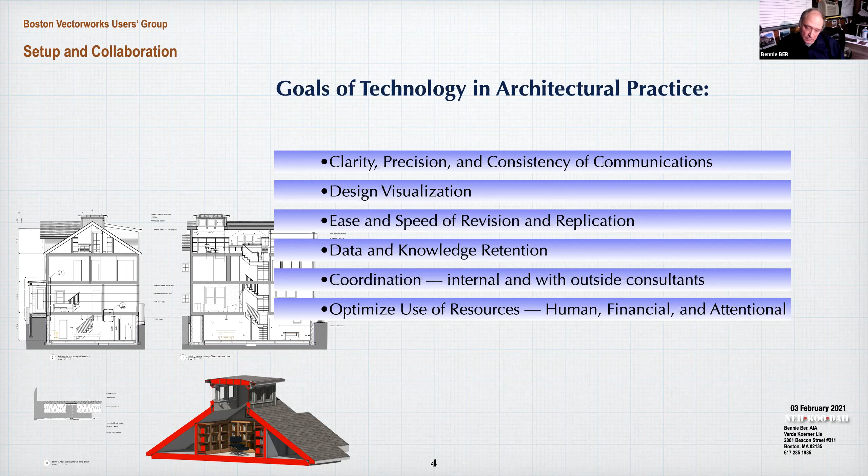And there's the obvious advantage of coordination, both internally between our own documents and then with outside consultants. And we, like I said, we want to be smart. We don't want to waste time or energy. So we want to optimize our own resources as we work. And like I said, the complexity is growing. We don't see that it's slowing down or it's going to stop or it's going to come to some kind of plateau. We just need to be ready for it.

Now, I don't know whether it happened to you, but it happened to me on a number of occasions where I opened the file that could be from another consultant or the client or some third party, and looking at it, it's like a bowl of spaghetti.

It's a bunch of lines, frequently all the same color, all on the same class or layer, as other packages call it, and I couldn't make sense of it, and that really saps a lot of energy. Instead of actually doing the work, I'm trying to figure out what it is that I'm looking at.

Now, that Intergraph station that I showed you earlier had some classes built into it, or layers, I'm sorry, they called it layers. You could have 64 layers, and who would ever need more than 64 layers? Now, there was this minor thing that you couldn't name them. They were numbered, I think it was 0 through 63. But then how difficult would it be to remember what you put on layer 23 or layer 55?

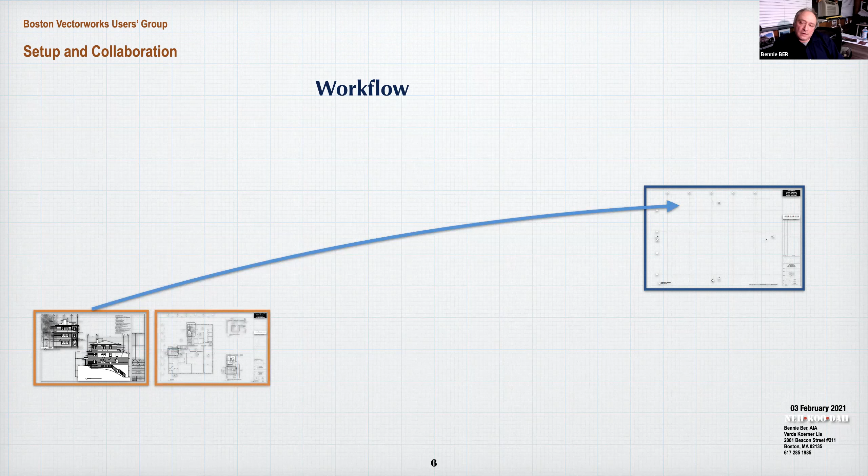So how did we start with it? And that was years ago. When we start a new file, a new project, and we start working on it, we refer back to an old project and we just cannibalize pieces from it—symbols, line types, whatever, details. And then we cannibalize pieces from another project, and this way that was the basic approach to recycling knowledge, recycling things that we've already knew how to do.

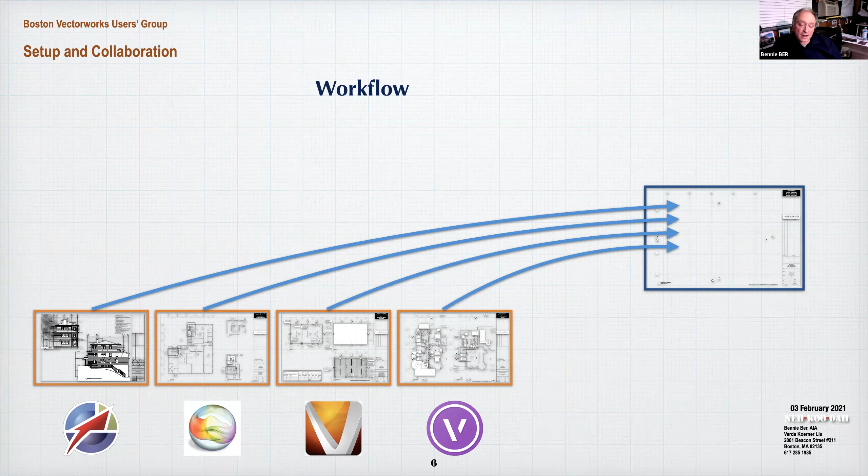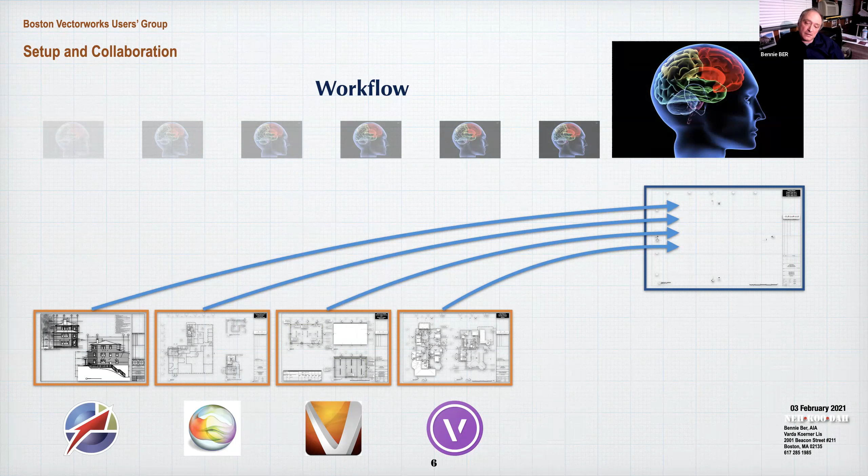And it can make sense, except that each one of these projects was done in a different version of Vectorworks. So the level of sophistication, the use of the technology was uneven. So if you go back to a 10-year-old project and you get things out of it, you may be dragging with you all kinds of unwanted legacy. Additionally, there's another little thing, is that our mastery of the technology evolves with time. So the things that we knew when we did the earlier projects may not be the most state of the art.

So, okay, we know that layers or classes are important, and we don't want to spend time trying to figure out where to put things when we work on a project, because we draw a line, we need to decide where it's going. Creating a template gives you a framework with all the places to put stuff in it. So first, where are the templates? If you go to Vectorworks preferences and you look at the user folders and you reveal them in Finder, it will tell you where they are.

On the Mac, it's in the Macintosh library, which is kind of hidden by the operating system, so you kind of need to know the secret how to get to it. But if you go through it, you get straight there, and then you see that under the Vectorworks folder, there's a folder for each release of Vectorworks, and then there are libraries, and under defaults there are the templates, and under the templates you have some folders for various templates. And essentially everything that we modify that is our own, we put the letters NKD to it so that we know that it's ours, and that's where we find it.

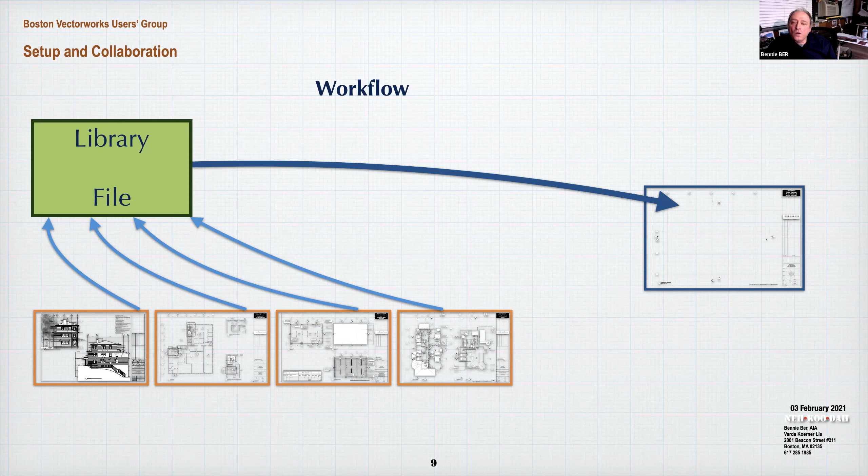So our workflow now is that we still have those old projects that we worked on 10 or maybe even 15 years ago. But instead of cannibalizing them directly into the new project, when we see something in each of the old projects that we think is worth preserving and using in the future, we just drag it into a library file. And then from the library file, we bring it into the new project. What that does, it gives us a centralized location in a library file where if changes need to be made, if a new release of Vectorworks introduces a new capability that's useful for any of these particular resources, we just update it there, and it's only one location that we have to go to.

Now, Vectorworks itself builds suggested workflows into product updates, and those change. I remember they used to have those default layers that were called mod-something. Maybe some of you remember. They've abandoned those, and they have new ways of doing it with the stories. They streamlined the creation of design layers. So we actually removed design layers from a template, and we just have default layers for stories that enables us to generate those layers quickly on an as-needed basis.

And we found out that sometimes the template gets very bloated, and just when we start a new file, even before we drop the first line in it, it's already 40 megs in size. So we try to get that under control to the extent that we can. The resource browser matured into the resource manager, and it has more and more capabilities with each release, and we use it more and more.

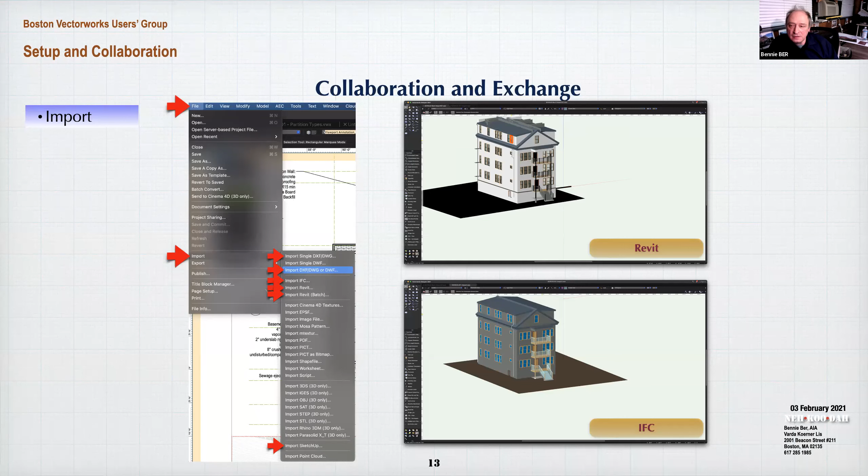I can tell you that the IFC import was a lot smoother, took a lot less time. Revit was a lot of trial and error. The IFC import is, like I said, more stable, and it has more options, and it has the advantage of being imported as a reference. So this is one way of looking at what's available for import in IFC. IFC, I believe, stands for Industry Foundation Classes. It's an exchange format for BIM. I don't know a whole lot about it, other than that it works.

And when I tried to talk to Vectorworks tech support about extracting IFC data for scheduling purposes, they essentially dissuaded me from doing that. They said, no, that's not how you do it. So it has a limited functionality, but within that limited functionality, it works well.

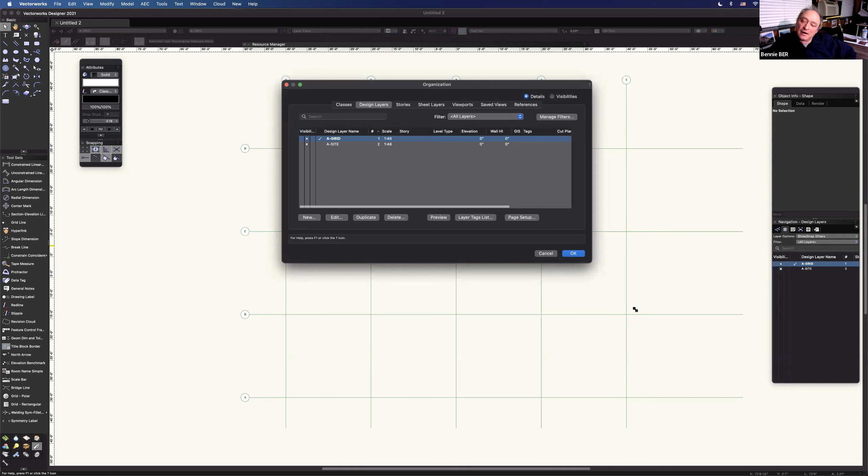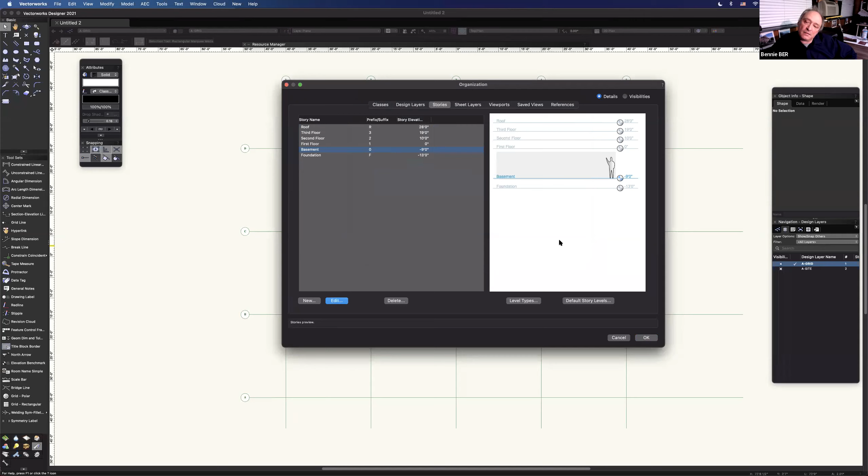If we need to create new design layers, we can do it through the stories. We have a number of stories predefined, but they don't have design layers associated with them. So for example, I know I'm going to have a basement, and if I click edit, we have an existing to remain, new work, and demo layer, and just put a check next to each one and say okay, and here they've been created automatically. Same thing we do for every other layer.

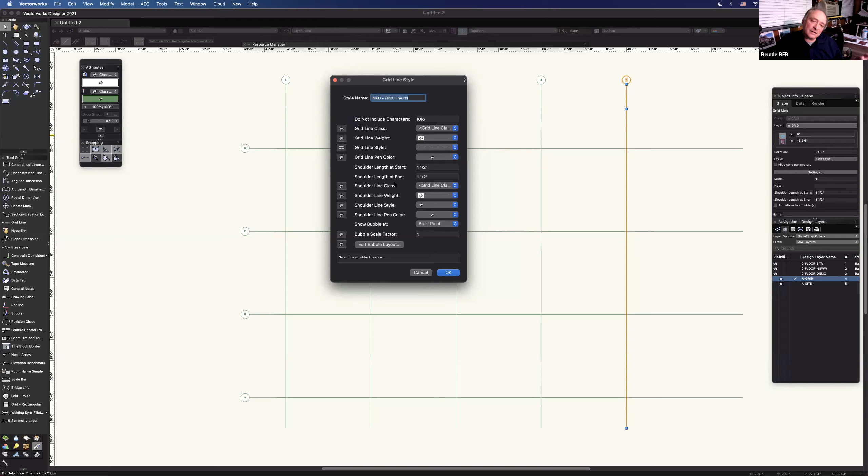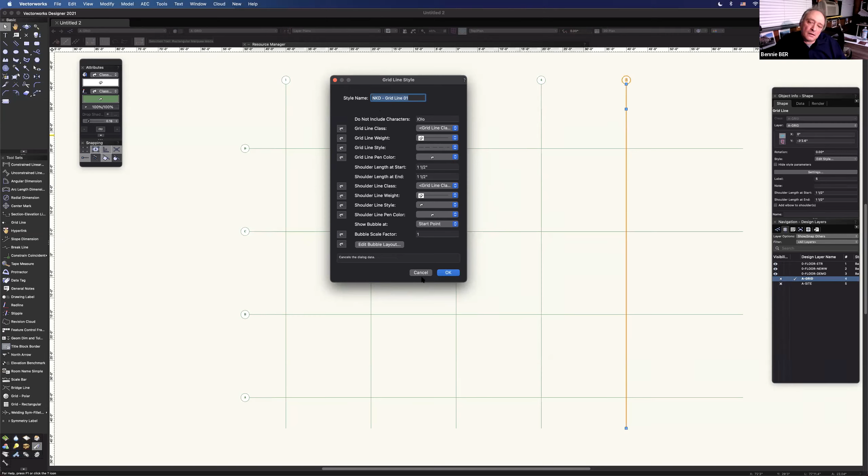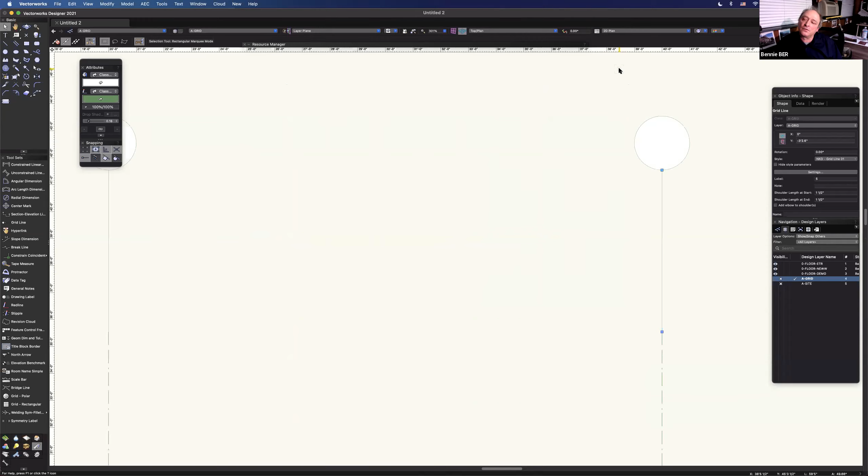So we predefined a style for a grid line that has our letters, the NKD here, and this is how we use them. This enables us to use different typefaces for different styles, because we used to try to be consistent and everything was the same typeface, and now we realize that it may make sense to make the grid line number or letter a little different so that it stands out on the drawing sheet, and we control it by style. Same thing we do with the drawing label style. So those styles are defined in our template.

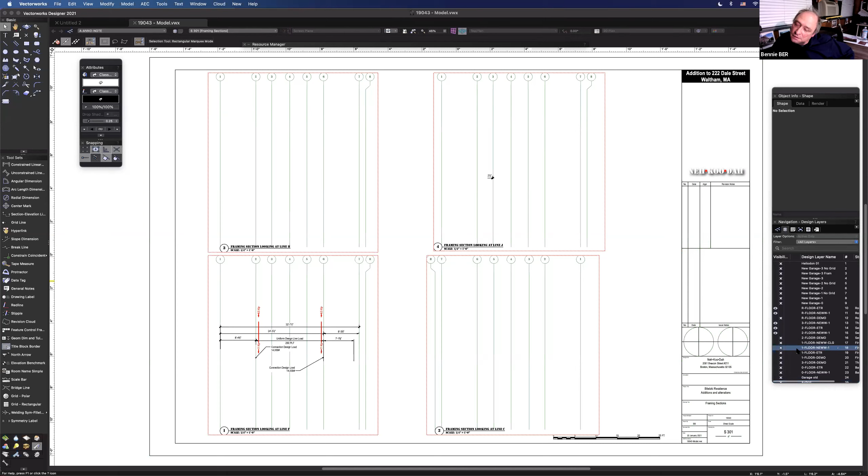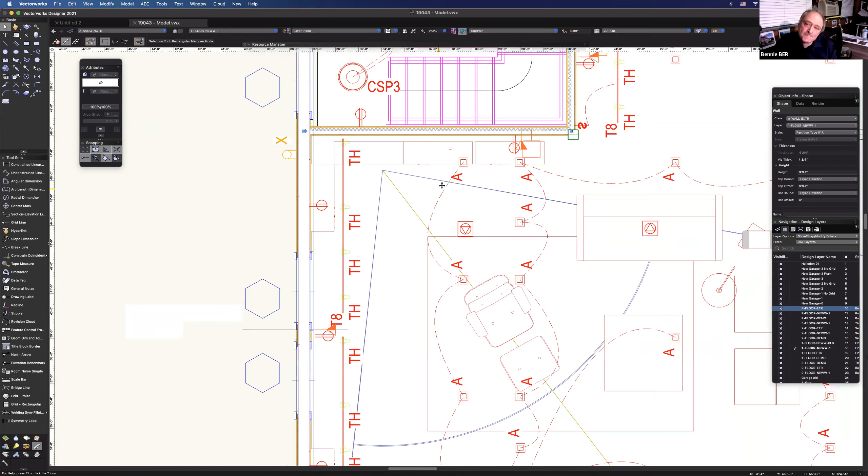So I'm going to go back and open a file of a project that's in progress. It's a project that we're working on right now. And it has a number of different styles assigned to it. If I pick a wall, this is an exterior wall. Actually, this is not an exterior wall. I have an exterior wall here, and it has a style right here. And if I go to edit that style, I can see that it has a number of components. It has a fiber cement siding. It has sheathing. It has the framing, and it has the gyp board.

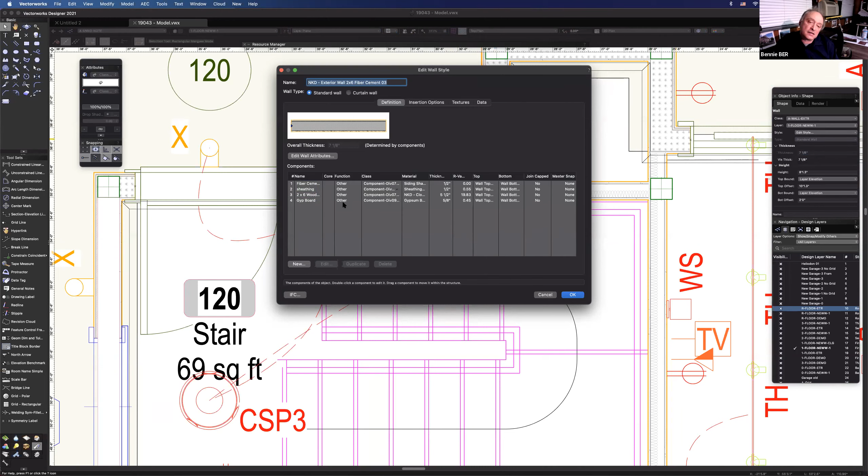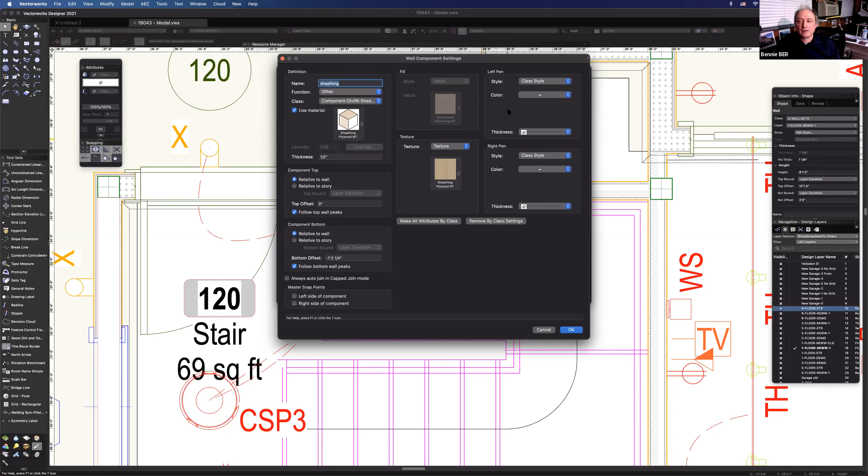And each one is assigned to a class. So if I, for example, look at the sheathing and I go to the class, it's assigned to component division 6 sheathing. And in this case, it also has a material assigned to it. But everything else we try to define by class. So this wall, if we want to control its graphic attributes at different scales and different types of viewports, either plan or section viewport, we can control it per scale, per viewport, and it always defaults to the attributes that are assigned to that class.

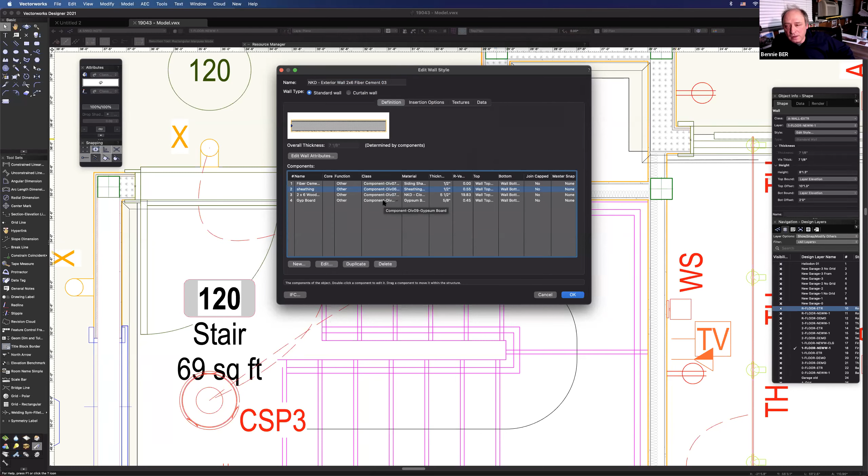So each piece of that wall can take different attributes, and there's more graphic control for us on the way the documents end up looking. Similarly, doors. This is a door style. I can edit this style. And here I see, it's very similar to the door settings, except that it defines by style. So everything that has that little curvy arrow here is going to take its definitions from what it says here.

So at this point in this project, we were concerned about the trim, because we wanted to have some exterior views that may be rendered. So we assigned a particular class to everything that says exterior on it here. But one of the powerful tools with door and window styles is that if I have it defined for one style in this file the way I want it, I can then go and import class settings from any other style that already exists in this file. And again, this goes to graphic consistency.

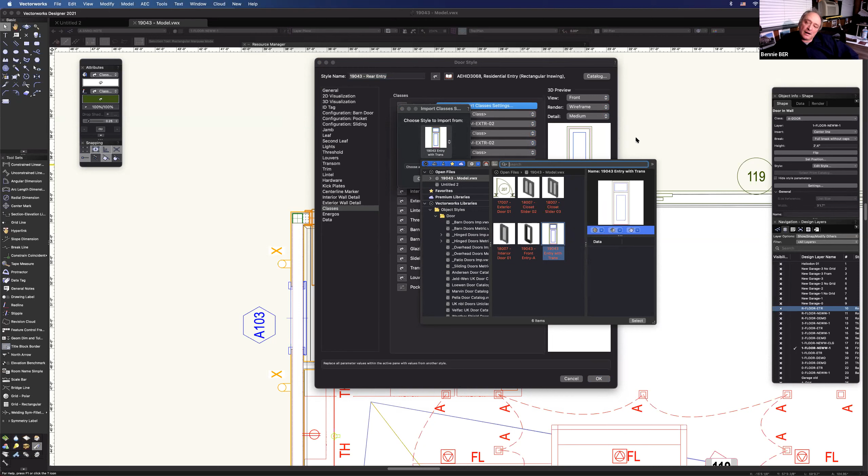So it saves us time. We don't have to do it one by one for each door or for each door style. We define it once, and then we deploy it for all the doors in the project. And when that's assigned, then all we have to do is go to that class of the exterior trim or whatever and change its texture. And now instead of gray trim, we have white trim or whatever. And we can make changes quickly.

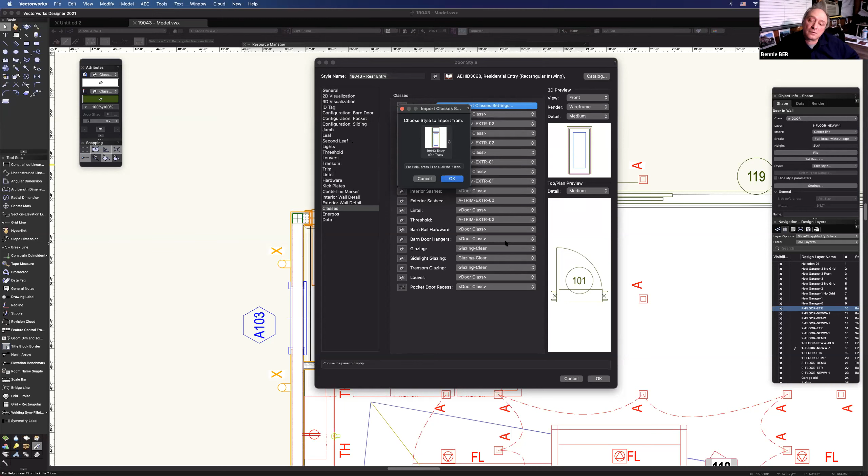Same thing for things like thresholds. Sorry. If I go to the threshold and I have a number of different dimensions that are defined for the way the threshold works on this door, I can import it from another style. And again, same threshold for every exterior door. Same goes to trim. Can import from here. So we use it more and more. That's what I find.

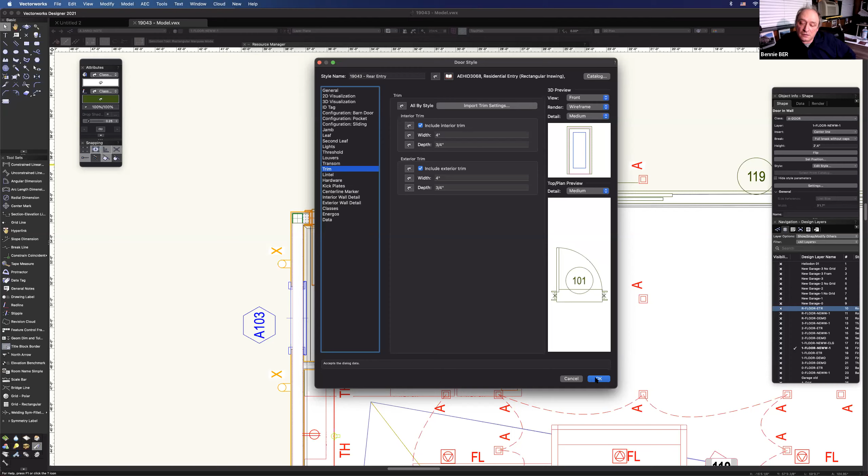If I cycle back to where we're talking about exporting DWG, if I want to export the DWG of this file and send to a consultant, I go to the export here and I get the export options. And here I have a number of export settings that I created for different consultants that we work with. So that, for example, we have a consultant, Energy Economics Inc.

If I want to export to EEI, I know what version they're on. I know what they want to receive from us. I know that they're MEP and electrical, MEP and fire protection consultant, so they're not interested in other things. I can tailor the type of export to what they need, want, and expect.

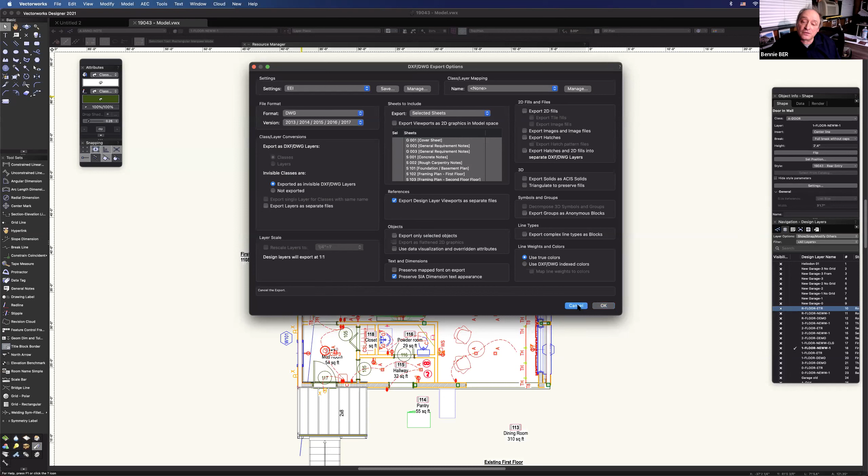So at this point, I'd like to know if there are questions or anything that you'd like me to cover that I haven't. Does anyone have questions for Bennie?

Yes, I think Bridget is trying, but we don't hear her. Sorry? Oh, she's asking questions. We're not hearing her. Can everyone unmute yourself? Bridget, well, she put something in the chat. Oh, that's right. I'll look for it. No, that's odd. We can't hear her. Huh. You're talking about me? No, I didn't put anything. Bridget, you can hear us, of course, right?

Bridget asked that with the DWG, she usually sees single lines when they import DWGs. Is there any way to avoid this? Single lines instead of what? Of walls? Yeah. I haven't seen that, so I don't know. But like I said, we don't do a whole lot of DWG import. A lot of the DWG import that we do is from survey engineers, and they don't really send buildings; they send sites. So I haven't seen this kind of loss of double lines to single lines.

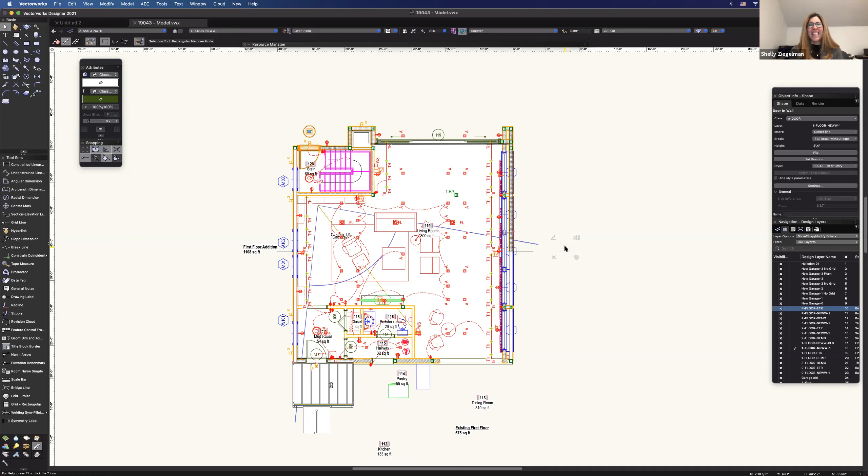So, we also don't do a whole lot of round tripping, and I don't know if any of you do a lot of collaboration and exchange and round tripping, and have more experience with that. We try to actually minimize it.

One of the things I like about project sharing is that you can lock people out so that they can just view layers, and some of those critical layers, like the ground plan, cannot be moved by anybody without administrative rights.

Again, there are different ways to skin a cat, but I would do that with references, so I can put the things that are critical in a file that's really not accessible to others if they're not going to change.

There's a question about when would it be productive to use IFC. I find IFC to be useful exchanging with Revit users. I think we've had success going both ways with IFC, both from us to them and from them to us. And like I said, there's a little more stability and more predictability in how it works.

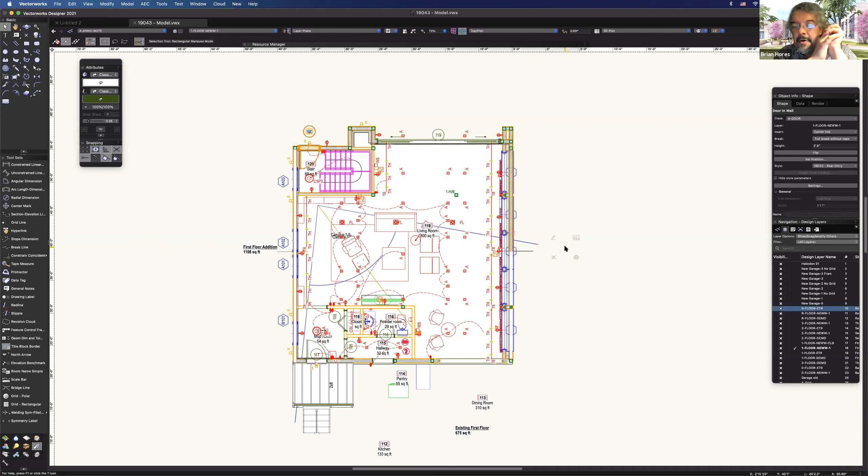So you can take the objects and manipulate them, but it's not really supposed to be used that way. It's sort of a temporary way to maybe get your model to look good for a rendering, like that column sticking out of the wall, I need to move it back to make it look right. I can manipulate it a little bit, but really everybody takes care of their own trade and updates the model as changes are made.

Hey Bennie, can I ask a question? Go ahead.

You were talking about importing like a survey as a reference file, setting up a reference file, which makes sense to me. We always have that issue — if we just import into our file, then you get all those other classes and it just makes a mess of things. So can you just explain how you do that? Because I have actually not used reference files.

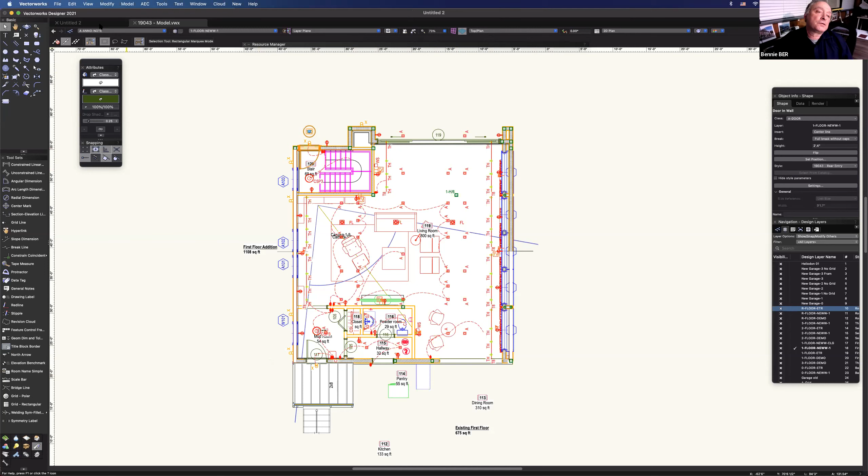So right here, this was the file that I opened from the template. It's not really an empty file, but there's no building geometry in it.

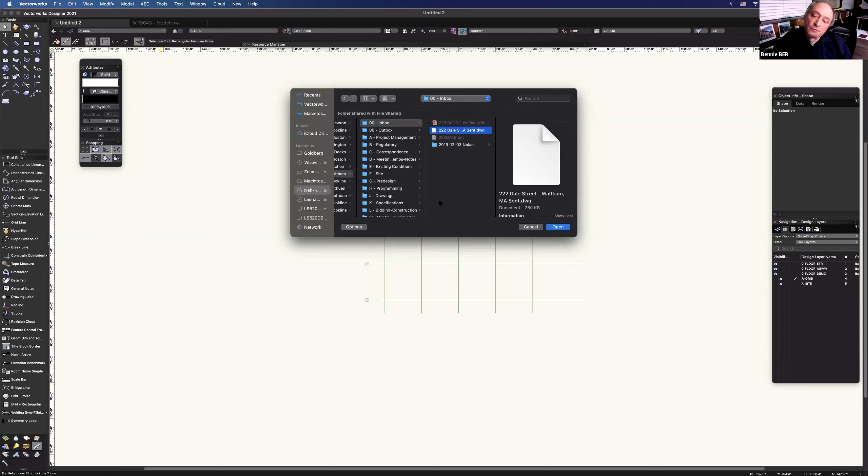If I go to import, and I want to import a single DWG here, it asks me where to find it. I'm going to see if I have a survey of this same project we're talking about. So, okay, here is a DWG that came from a survey engineer. I think this is it. I say open, and it reads it.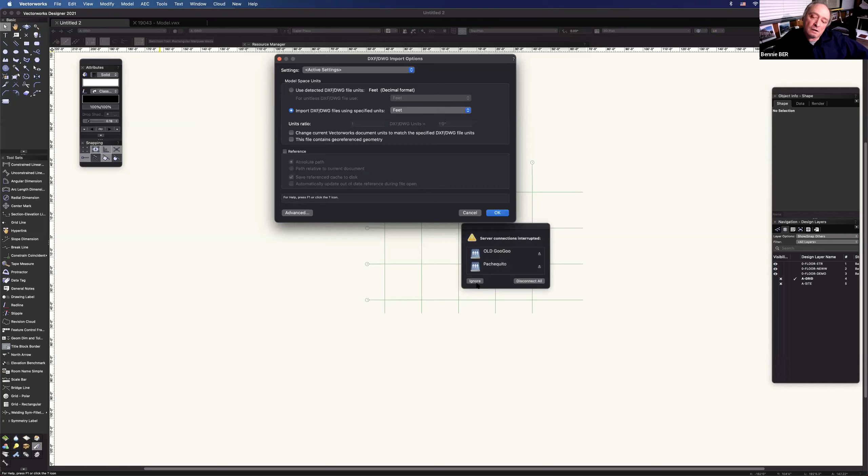Here are the DWG import options. There may be an element of trial and error here, because I assume that what the engineer sent me is in feet, since most survey engineers work in feet, but that's not always the case. Other than that, I don't change anything here, and I say okay.

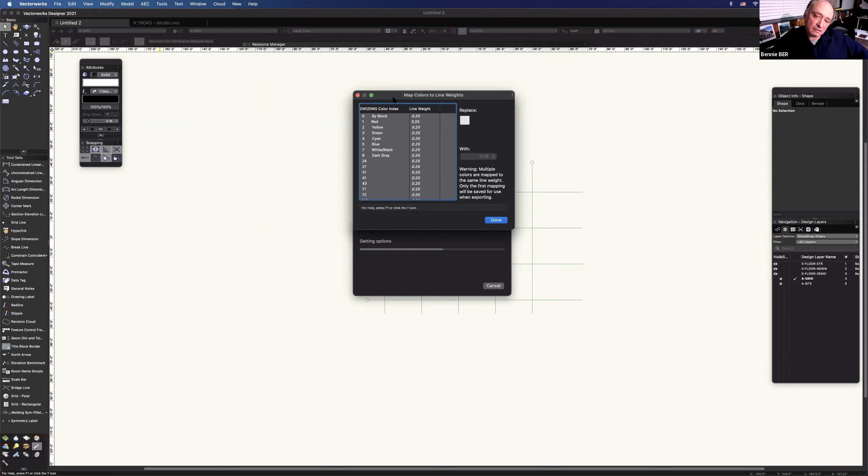Now it asks me to map colors to line weights. I'm not going to sweat that, because I honestly don't care about it — if I need to use their line work, I'll do it on an as-needed basis. So I'll accept the default, and then it asks me for font mapping. Here we try to work with Arial Narrow for everything, so I just map everything to it. It says the import succeeded, and here's what came from the engineer.

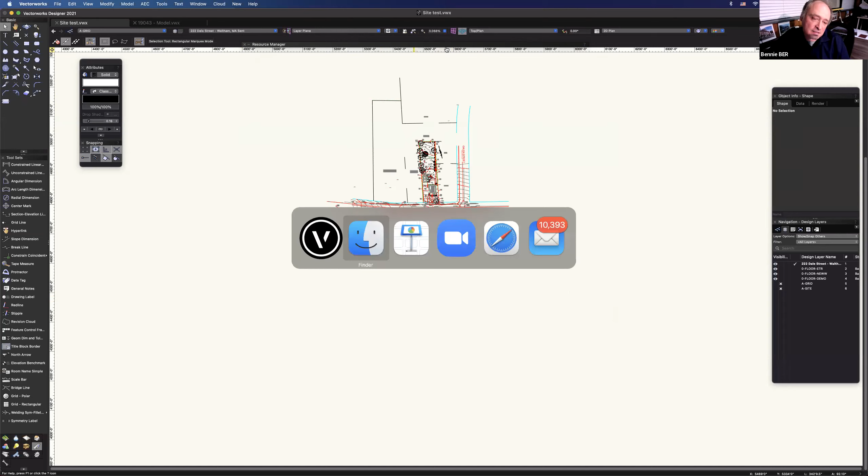So now what I do is I save it as — I'm going to try not to do that in the project file, so I'll do it in a folder for this presentation here. I'm going to call it site test. So now I have a file called site test, and it sits in the folder for this presentation.

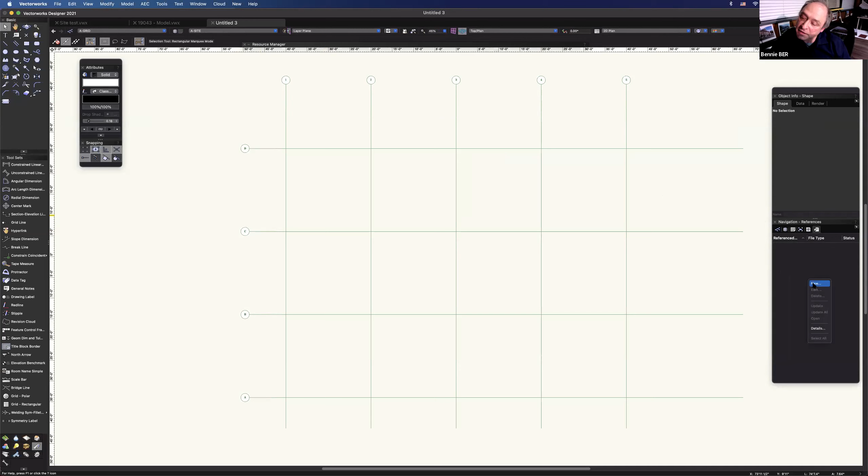I'm going to start a new blank file from the template, and here it opens up. I go to just any design layer, and I ask for the reference here. I right click and I say new reference, ask for new reference, and I go looking for it — sorry, it's here.

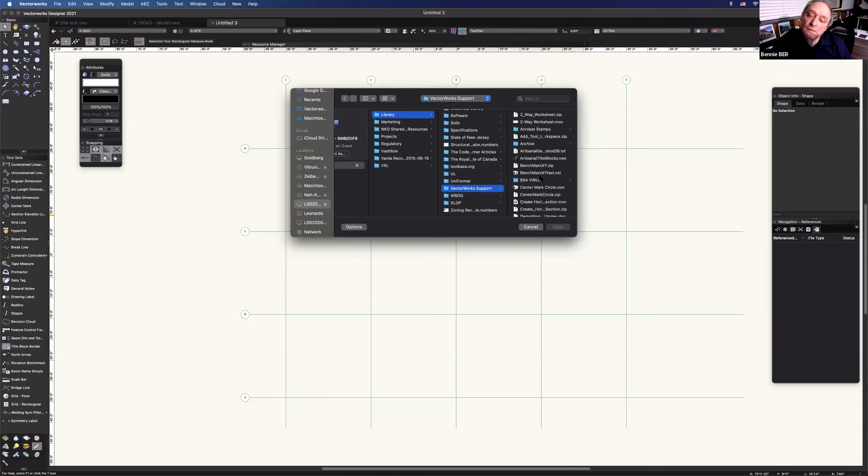And here's a site test.

Vectorworks tells me creating a reference to a Vectorworks file in this manner allows you to reference resources from that file via the resource manager. If you want to reference layer geometry from the Vectorworks file, use the create viewport command to create the design layer viewport.

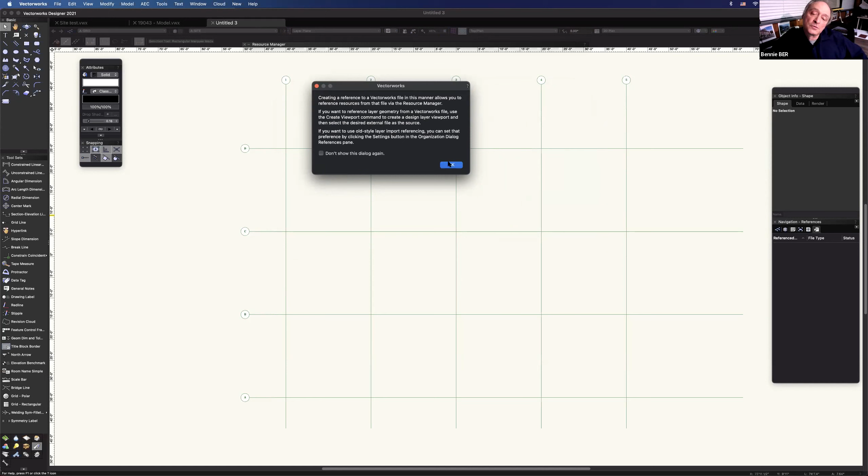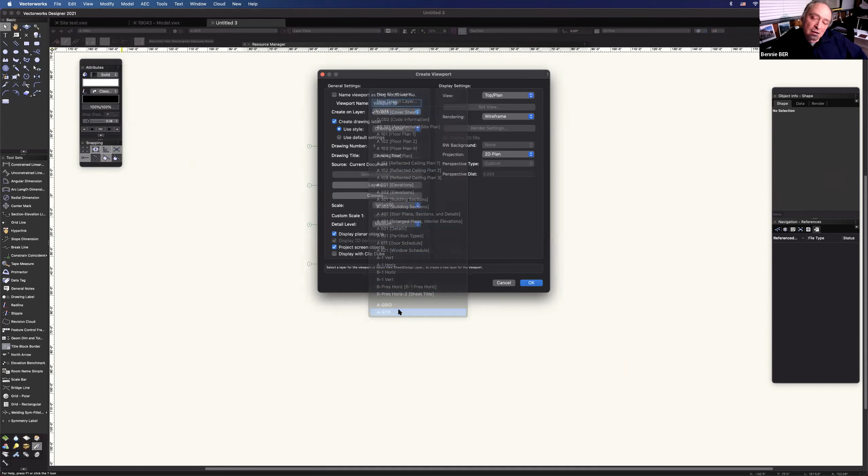So I behave like I'm creating a viewport, and I'm telling it to go to this design layer. Now a lot of the viewport options are grayed out, because when creating a design layer, I don't have the options available for sheet layer options.

And it asks me what's the source. So I go to select source, and I'm going to an external document, and it's a new reference. I go to choose, and here's the site test.

I'll just take the absolute path to it, mainly because the new file I created, I actually haven't named it or saved it anywhere, so it doesn't really have a location. I say okay, and now the survey shows up on my design layer right here in A-SITE.

But in the object info palette, it shows as a reference viewport. And here, just like any sheet layer viewport, I can control which layers are on or off.

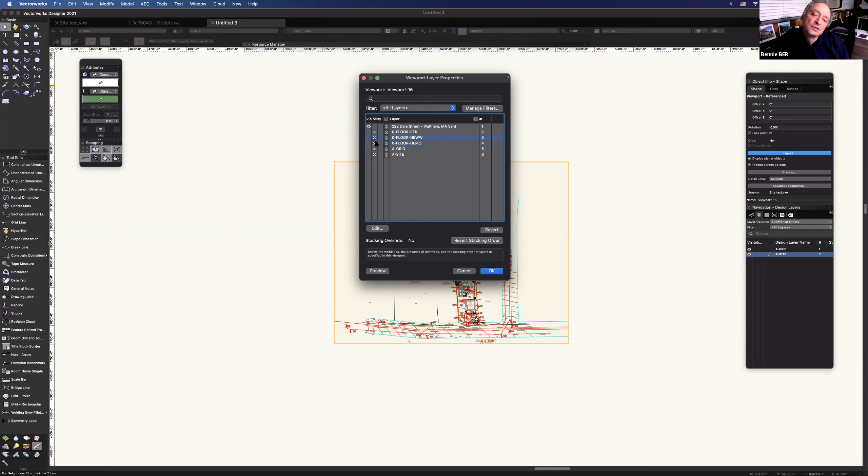When I did the import in the other file, it all went to one layer called 222 Dale Street, because that's how the engineer named it. There's nothing on any of the other ones, so I can actually turn this off, all of them except for that.

That's still the case. And I can control the classes. So here, for example, I see all the classes that we have in our template.

I can start seeing here all kinds of classes that really don't fall into our format. So I see there's a P drain line, lot labels text, lot labels, LGD text TM or whatever. And I know that these are the classes that came from the engineer, but they're all on.

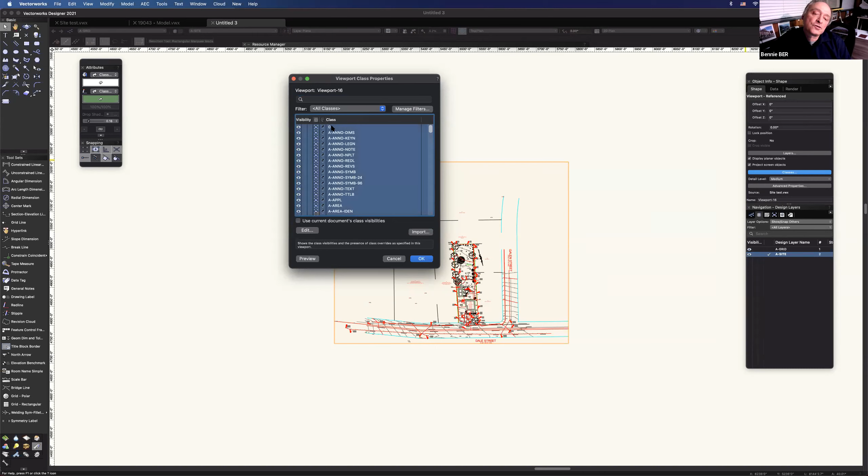I can here select all of them from first to last and just ask them all to be in black. I think it will work.

Now it will work. Now you see that the arrowheads that came from AutoCAD are off the scale, because Vectorworks has design layer scales and AutoCAD doesn't. So everything here is 48 times the size, because that's the scale I had set it to by default.

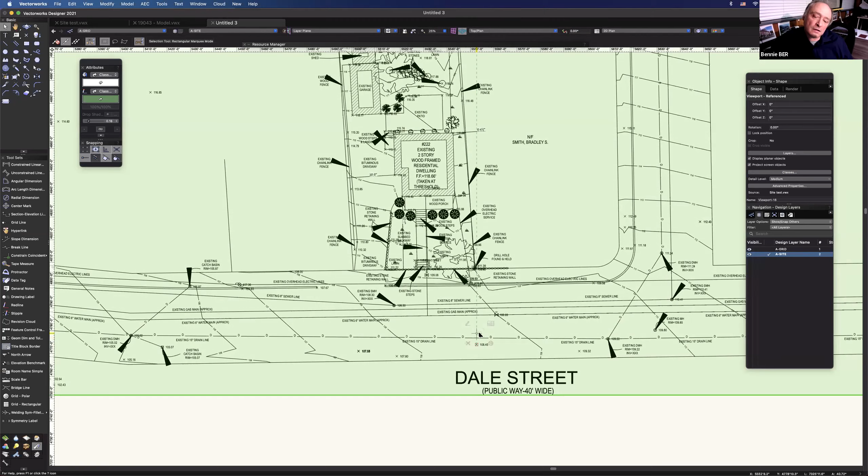But this is just a reference. It's not... so if this came from the engineer like this, but...

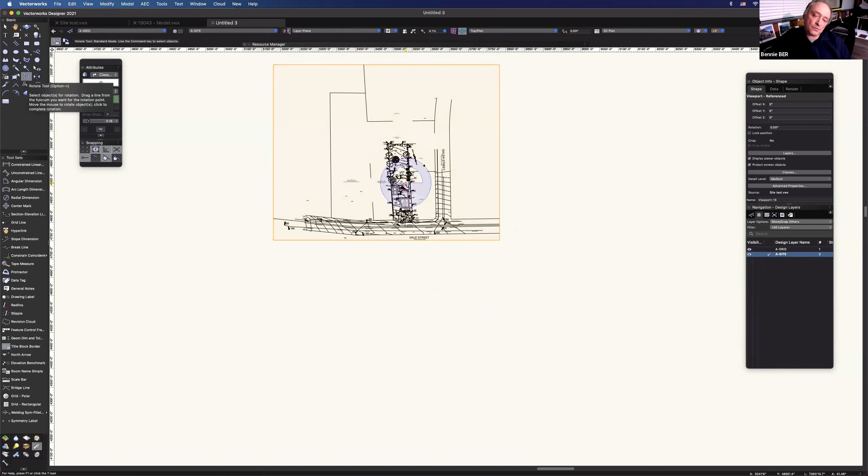We've already drawn floor plans for the building and they don't agree on the orientation with the engineer. Let's say here's where he has his north. I can take this whole viewport and just rotate it so that north is pointing up, and everything moved as one piece, and it did not affect the other file.

So I think there's a layer of insulation between our work and the consultant's work by doing this reference. It also keeps the file size down, and it's a little more hygienic because you're not importing all those class names from another consultant.

Yeah, so we do project files a lot now since we're all working remotely. I assume if the reference file would have to be on the same Dropbox or server that everybody's keeping the project on, or where the project file is located, then it'll still update for whoever's working on the file. Yes. And in theory this file doesn't change because we're not... Right. Okay, cool. Thank you. Sure.

I believe with project sharing, if you have the reference file, there's an option for an absolute or a relative location. So you can put that in a definitive location and not worry about the folders separating from the working file or the project file.

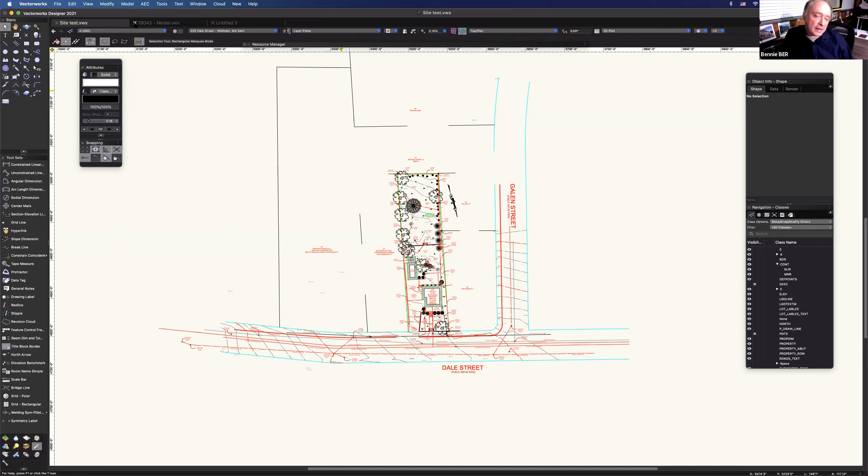I once did that, and I wrote the prefix of a survey engineer who we worked with, and every subsequent import from AutoCAD defaulted to that, because if you don't change it, they'll keep doing it. And then for a number of projects, I had a slew of classes starting with the word Chappelle, because that was the name of that engineering firm. So you have to be careful with that. But you're absolutely right. It works.

It's useful. Again, the reason I like working with references is that I can insulate it in its own file, and I don't have to work in it. I don't need to adjust my brain to the way some other consultant thinks. Yeah, it can't be manipulated or modified unless you go back into that file and start moving things around, so somebody can't accidentally grab the property line and drag it off for you. And much smaller file sizes is the other big benefit. Smaller files is an important benefit, yes.

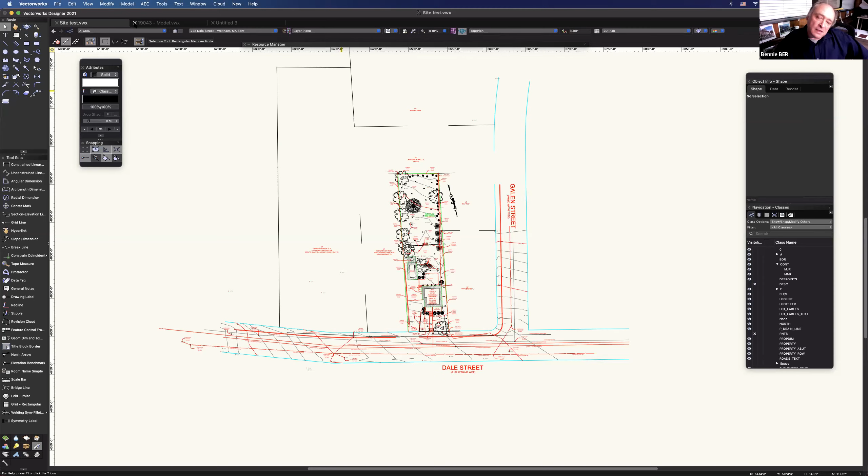So Bennie, if you want to change the way it looks, like you mentioned the arrowheads, you go into the original file and change it there, and it will automatically update the referenced file? I don't know, because I haven't done that, Shelley. I really don't like using their information because of the formatting issue. So, for example, when they surveyed this property, they marked a number of trees, but their trees are flat trees. So they're useful to us just in establishing the location of the tree.

But we'll go back and we can do one of two things: either manually place plants where they mark trees, and we'll do it on our design layer, so again, we don't cross-contaminate. Mm-hmm. Or, which I haven't tried, I can use the magic wand and select. Okay, it's not doing it. I can select all the symbols with a certain name, or everything on a certain class or whatever, and just replace those symbols with our tree symbols that are three-dimensional, that have more to do with what we see in the project than what the survey engineers saw. Mhm.

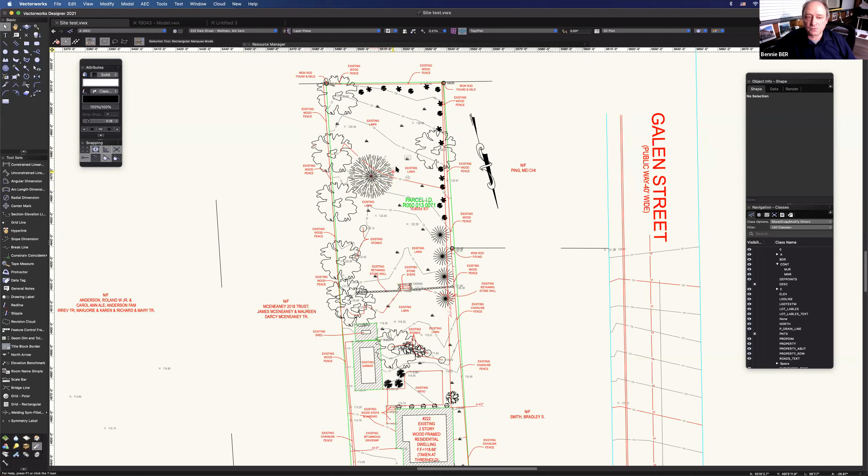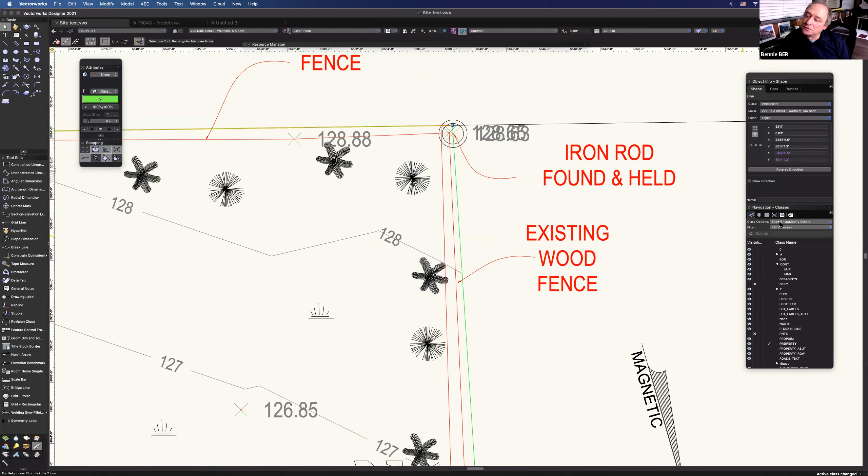So you basically make your own layer of information that you want in your drawing. I do, with one possible exception. If I pick a line that the survey engineer put on, and I see that they put it on a class called property, and I activate that class, and I ask to look only at that active class, now I see that they have property lines. I'll do select all just to make sure that I'm looking at everything, and I see only the 3 lines and all property line.

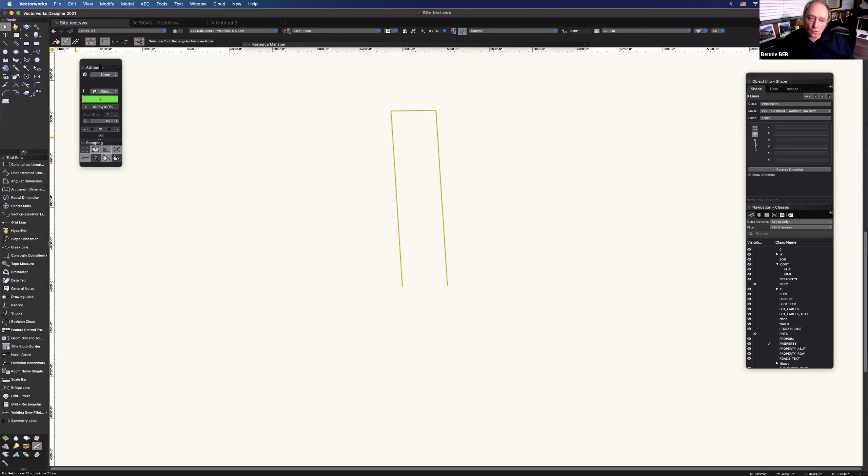Now that I have a reasonable level of certainty that I know what I'm looking at, I can move them to our design layer and our proper class name. And then I'll make sure that they show up by class, all the attributes. And now we've essentially converted the engineer's information to our standards. But I'm very careful with that, because again, if I do that en masse, I run the risk of inheriting the mess that they created, and they do create mess.

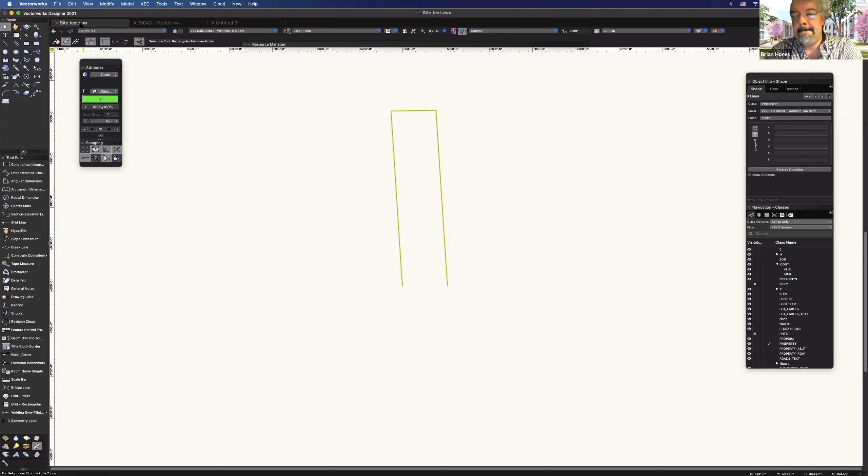But you can take a reference drawing and select certain things like the property lines and bring them over and classify them how you choose. Yes, or in this case, you have to go back to the original drawing. You do. Okay. So you can't take it from the reference drawing. Not directly from the reference, but

if I'm here in the file that it's been referenced into, and I look at the reference tab here, I can right click and open it. Right now, the file is already open, so it just will switch to that file. But if the file is not open, it will open it from here. And again, if you haven't moved it, you can do copy and paste in place, and it'll fall right into place. Again, provided that the design layer scales are the same.

Does anyone have any more questions? Well, Bennie, this has been very helpful. What a wonderful presentation, very organized. Very nice, Bennie. That was great. Yeah, thank you. Thank you.

It's terrific. And next month, Jim, you're up for next month? I'll take your word for it. What? I'll take your word for it. I think that's what we had planned, March. You volunteered for March. I'm always there. That's great. Great, great. A couple of, oh, go ahead. I'm sorry. No, nothing. We'll work out exactly what you'd like to do. We can do that offline unless anyone. Well, whatever everybody wants. Yep. Well, I have a couple of things that I put in my template files that I just wanted to mention, but Shelley, I didn't mean to cut you off. No. Go ahead. We have plenty of time here.

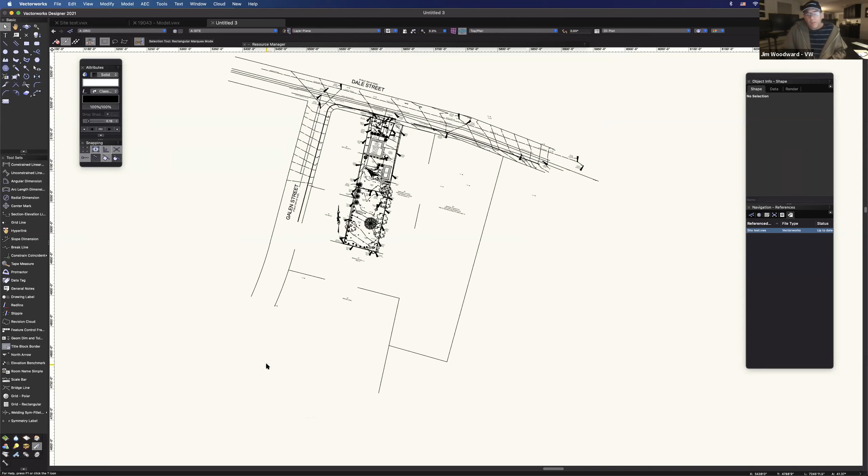And I think the one thing that we're missing in our worksheets, I'm not sure if it's proprietary or not to Excel, is we don't have a way to do a fill series for a sequence of numbers. So that's the one thing that I really like Excel more for than anything else. And there's so many better format tools in Excel that I find it much less time to just send it out to Excel, do what I need and bring it back in than to try to format within the worksheet itself.

Yeah, because now the formatting goes through. It's not just a mess. When you used to export, it's a mess. You have to reformat it on both ends. If you have bold or highlighted stuff, it all translates pretty well.

There is one thing that I didn't cover and I just thought about it, and I'll see if it's opening up now. What do you do when the template has evolved to a point, but you have a project that started a couple of years ago and it doesn't have all the new upgrades that you've introduced into the template? For example, the drawing label styles that we did, and I started doing it one by one.

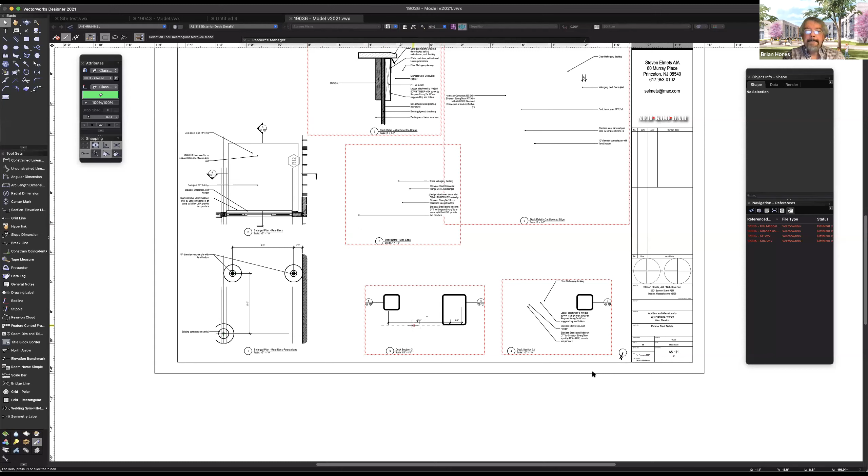Okay, I think it's finally up. You need to reshare your screen. Okay, yeah. So here's an older project that stopped about a year ago, and you see our drawing label is the old drawing label. It's not the way the template has them now.

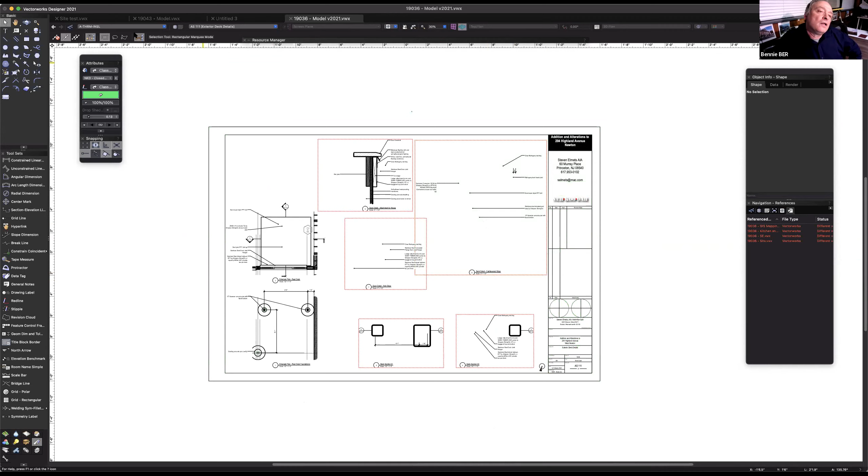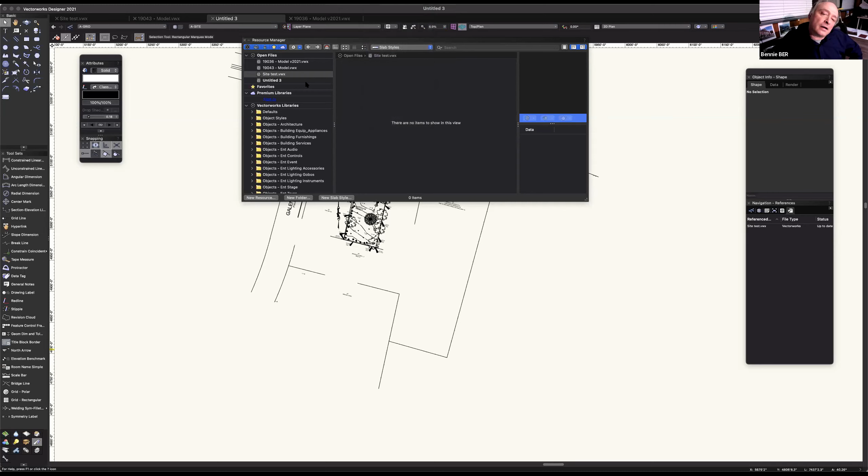And here is a file that was opened from the template, and if I go to the resource manager and I go to the, oh yeah, I purged this file, that's why. It's going to be maybe here, and maybe not. Hold on, I'm going to start a new file from the template.

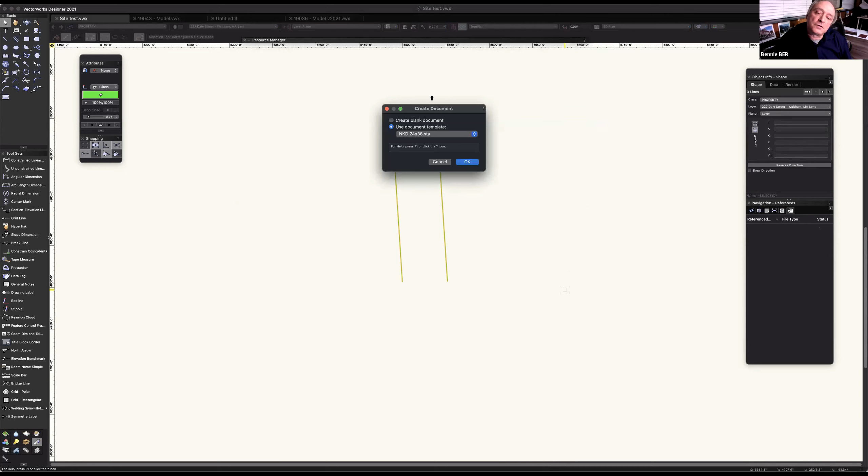I don't know why I'm not seeing them. This is a little annoying. But anyway, if I go back to this old file, and, oh, I know why.

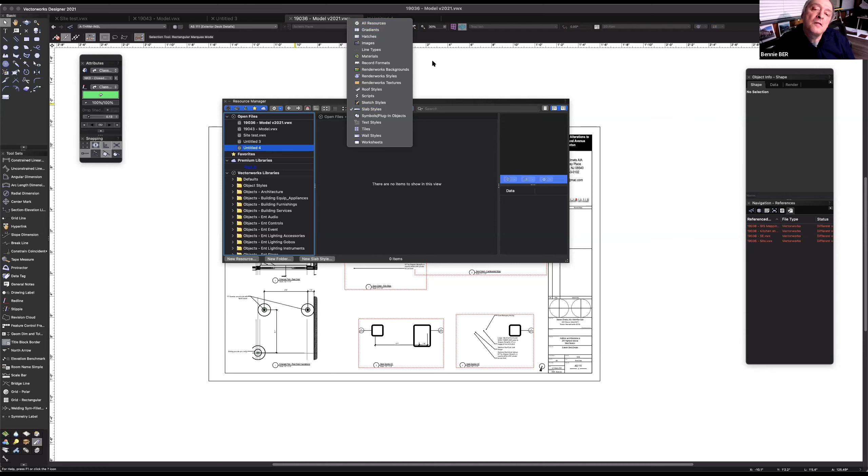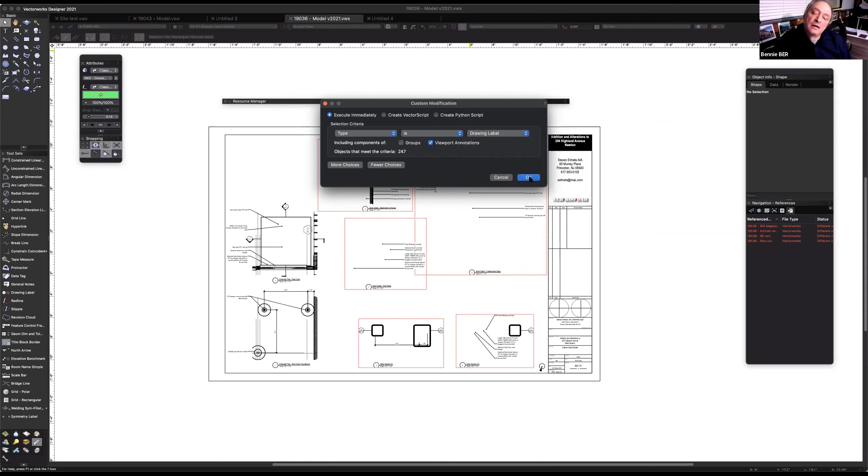But if you go to Tools and Custom Modification, and you say type is drawing label right here, and you click look also in viewport annotations, it already tells me there's 247 of them in this file. And if I say OK to this, and I wait a minute,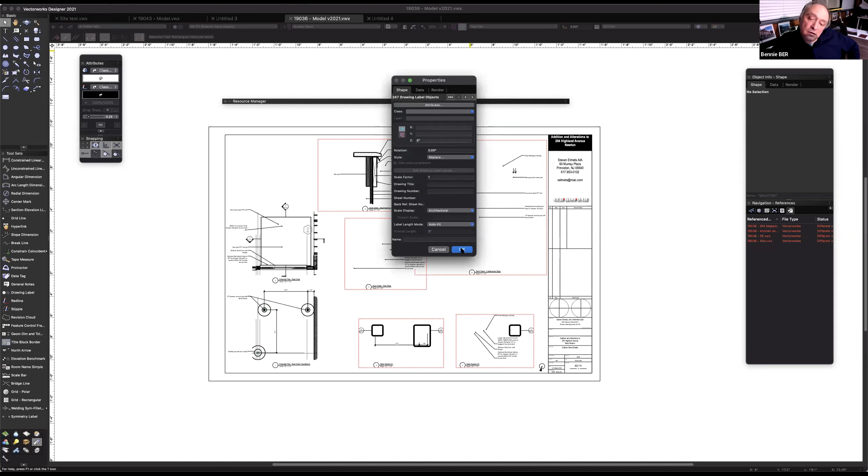I can change it from the unstyled, because at the time there weren't even styles for it, and I can replace the style to this new style that we have in our template. So if I double click and I say OK and OK, now it changed the style. It's just the typeface. But now this entire file in one operation changed all the drawing labels to this new style.

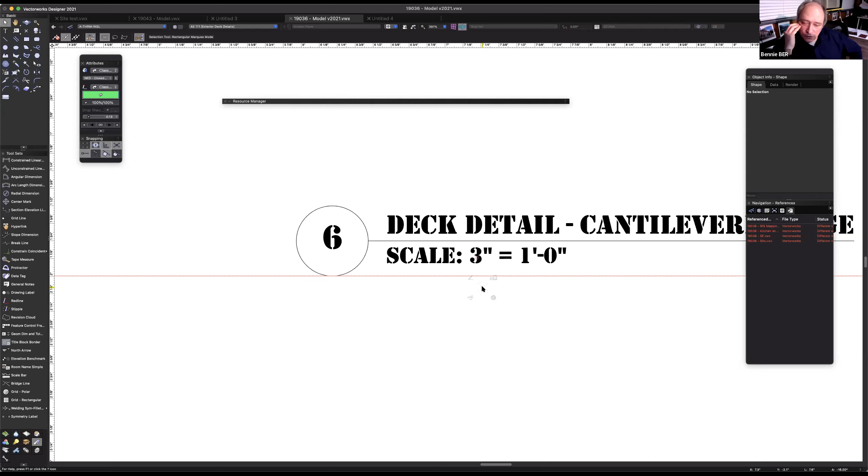You can do the same thing for detail callouts. Not really the grid lines, because the grid lines were completely rebuilt in 2021, so they have nothing to do with the old grid bubbles. But with grid lines, there's relatively few of them in a project. So if you need to rebuild a grid, you just rebuild a grid, and it's there.

I believe a good practice is that rather than just do the custom modification, if you have to do that to multiple files, you can save that as a script, keep the script in the template file as well, so that script will be available every time you open a new file. Can you do that as part of your March presentation? Because scripts are something that I'd really like to get into, and I haven't.

If you just want to do that process again for a second, it's just one more click. The checkbox there, yeah. So whether it be the selection or the modification, after you select what you had, there you go. And then instead of execute immediately, create the script, and then just hit OK.

And that's going to say, do you want a new palette of scripts? You don't want it to put it in your saved views, so make a new palette. And you can just call it custom modification scripts or whatever you'd like. Okay, I'll just give it a name. I know what it is. Hit OK. And then you'll put it into that one. Yep.

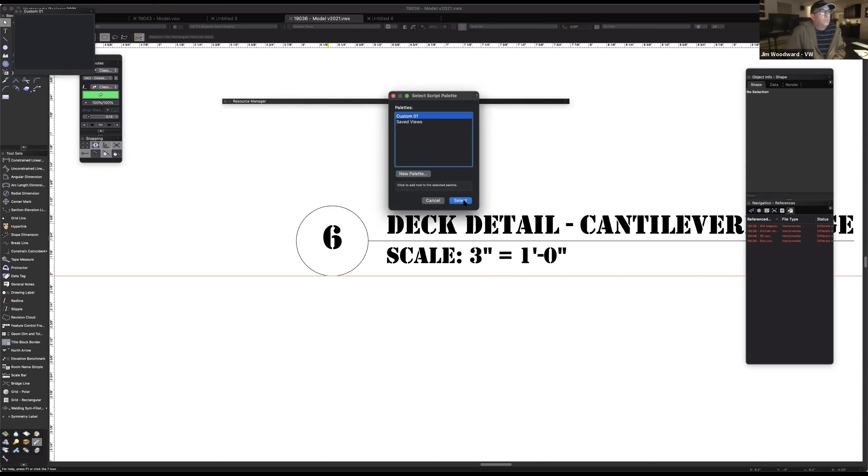And that one would be title block, was it? Or excuse me, drawing label. There you go. Drawing label update. Okay. And then if you go to your Window menu in Palettes, there should be one for scripts. Oh, Script Palettes, there it is.

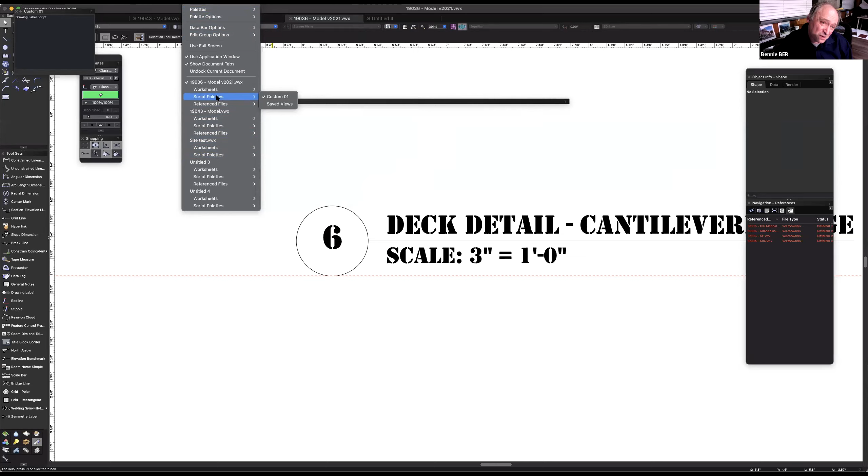So in the current file, you'll go down, you'll see script palettes, about halfway down. Keep going. Oh, you just went by it. Current file, there you go. So you have the custom one. And you'll see that palette was open on the top left, but it just went away. So do that once again.

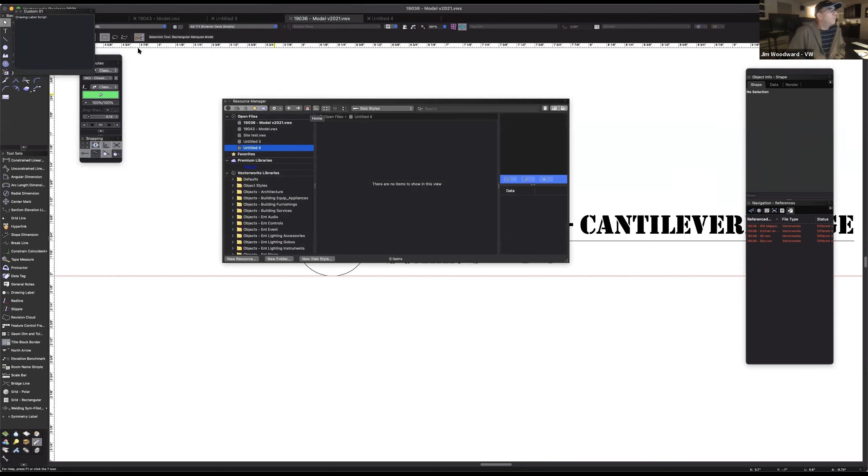There you go. And see in the top, you have Custom 01. You have a palette there. You can dock that or let it float, and then you can run that script. So if you save that to your template file, you'll have those scripts available to anything you're opening. That's cool. And it's also in the Resource Manager as well, isn't it? Yeah, you can import it or export it.

I like doing that just for selection. So if I'm trying to find a certain type of lighting fixture, I set up a script for each type of lighting fixture I use, and I don't have to go through the drawing. I don't have to set up the criteria each time.

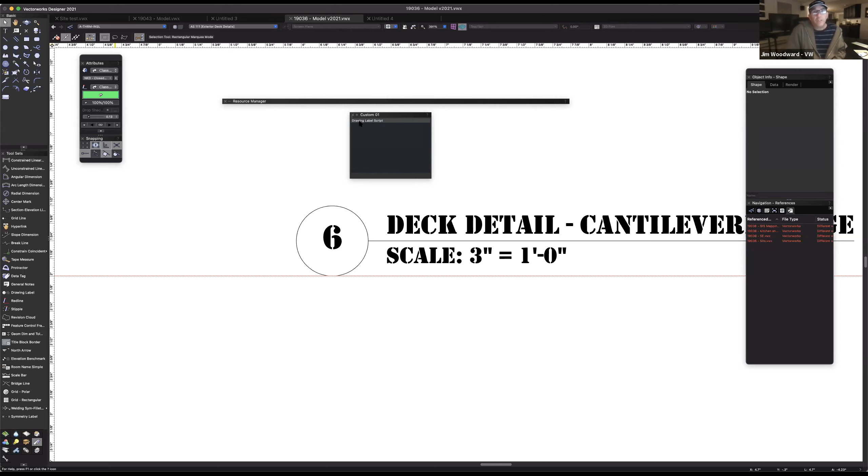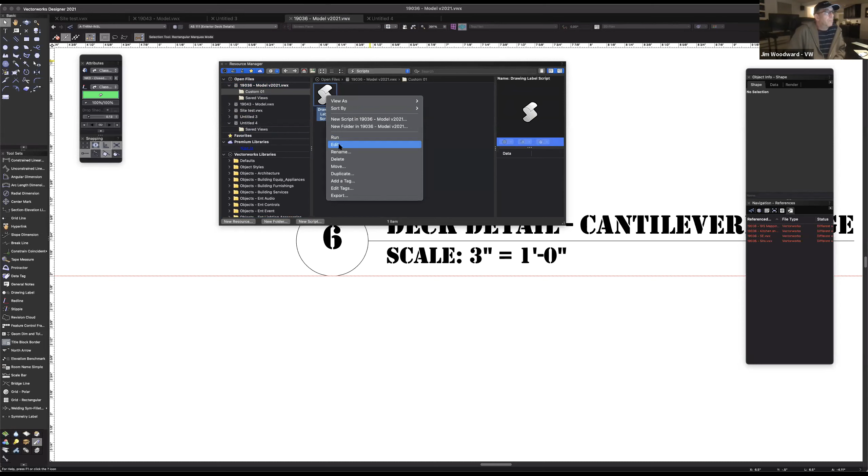Okay, that's cool. And the script shows here, right? Correct. That's the saved views. Is that your current file? This is the current file. Okay. So you can just right click on that and export. I want to understand how it's built inside. Oh, yes. So, okay.

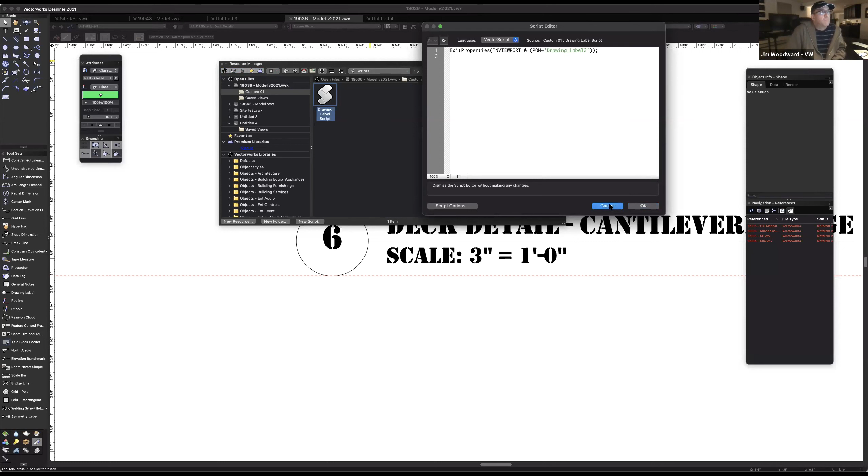I'm not a code kind of person, so that's the only way I can write script. Okay, no, then that's fine. I'm not a code person too, but I think if I see a dozen of these scripts, I'll start understanding, you know. Yeah, there is, I think, a guide to the syntax for it. Okay. That's pretty cool. I learned something new.

Thanks, Jim. Not as much as I learned tonight. I usually don't get to float around with the architects a whole lot. I learned a lot from them. I'd like to start using stories more. I'd like to find more uses for that.

One thing I saw, Bennie, when you brought up the stories, you had a graphic that had a person on the top floor on the roof level. Did you make that? No, that's straight out of the box. I poked around to see if I could find that. I've never seen that before. That was a very good graphic to help people understand the stories. I didn't have that on the right-hand side looking like that. I didn't go too deep into it.

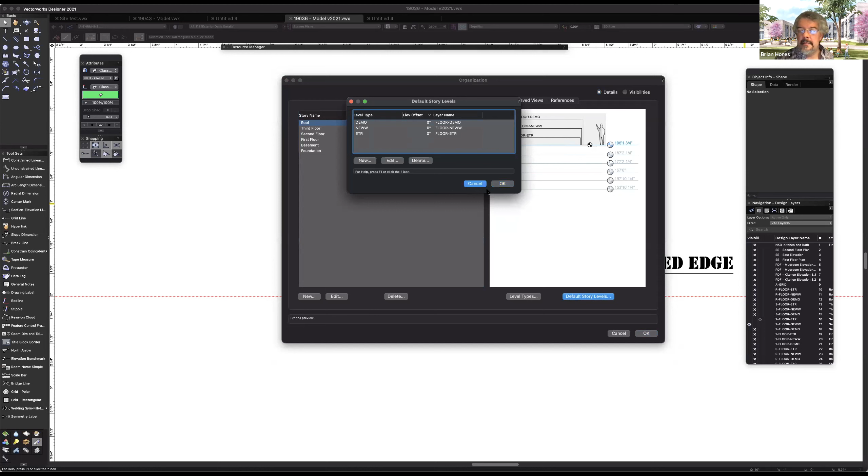It may have to do with the way the stories are set up, defined here either in the level types or default story levels. Do you know, Brian? About the default story? How to get that little guy there? I think it's just the graphic. If you switch to the first floor, that little guy is standing on the first floor. Yeah, I never saw that though. The mannequin's cool, but I never saw that layout. But then again, we don't use stories a whole lot because layers does what we need to break it up.

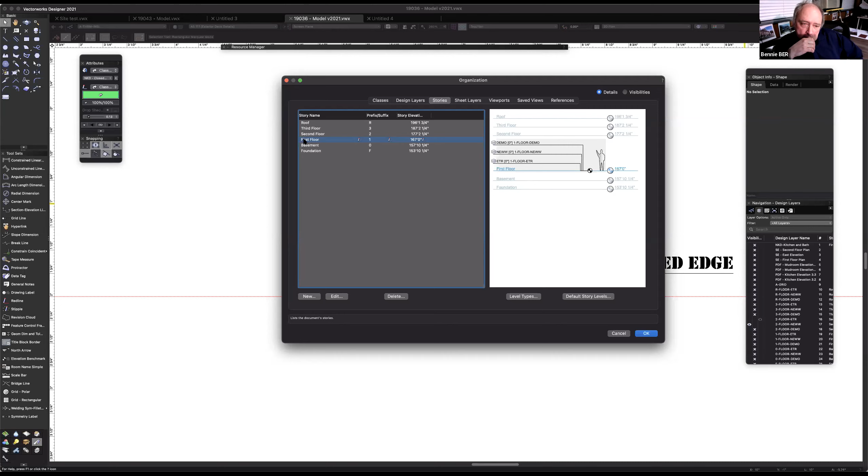That's a really interesting use, especially if you were doing a 2-story or 3-story exhibit, or a museum with different levels of the event. Yeah, and that elevation benchmark dot changes if you had a ceiling at 10 feet, it'd be above the guy's head. So do you use the ceiling layer for stories, Brian? I kind of go back and forth. I don't use it more because if there's a variation between a 7'6" ceiling and a 9-foot ceiling, and you set your ceilings at 9 feet, you have to remember the 7'6" is minus 1'6". So we started moving away from having it.